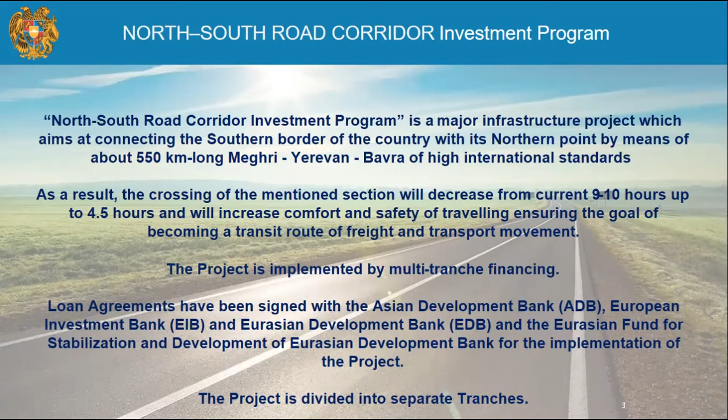On this slide, you can see all 5 tranches and the current status of implementation. The first tranche, 32 kilometers, is already completed. Tranche 2, Ashtarak-Talin, 42 kilometers, is in progress. Tranche 3, Talin-Gyumri, 46 kilometers, is in progress. Tranche 4, the Artashat-Sisian section, is the biggest one, 175 kilometers.

For this program we have the primary design. Today we will look in detail at the Sisian-Kajaran section, 60 kilometers, and Tranche 4's Kajaran-Agarak section, 45 kilometers, which is in progress. This section is financed by the Eurasian Development Bank, and Tranche 5, Gyumri-Bavra, is a prospective program.

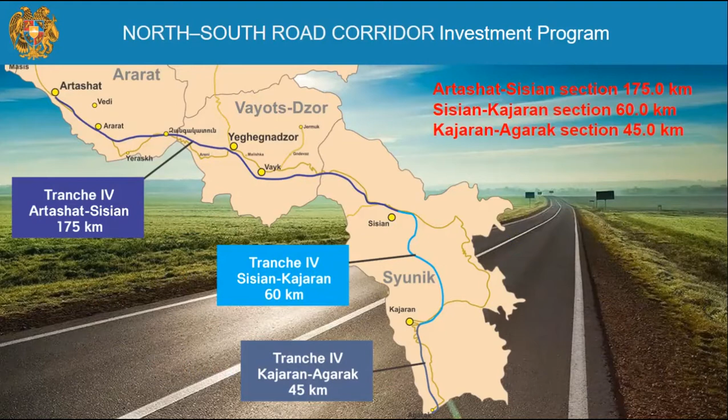On this map, you can see the geographic location of the tranches. The southern section of our program is Tranche 4, which consists of 3 sections: Artashat-Sisian, 175 kilometers, Sisian-Kajaran, and Kajaran-Agarak.

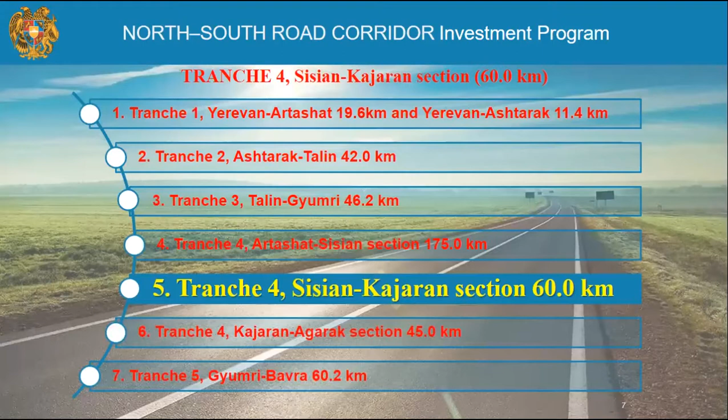Now a little bit in detail about the Sisian-Kajaran section. This section will be a completely new road. It is planned to construct a new second technical category road with a total length of about 60 kilometers, including 4.7 kilometers of bridges and tunnels totaling about 12.5 kilometers, the longest being the Bargushat tunnel at about 8.6 kilometers. The Kajaran section was designed with a new alignment, outside the existing alignment and interstate road, and the existing road can be used as an alternative.

Detailed design for the construction of the Sisian-Kajaran road section was developed in 2018. The total number of bridges is 27, all fully new, and the total number of new tunnels is 9.

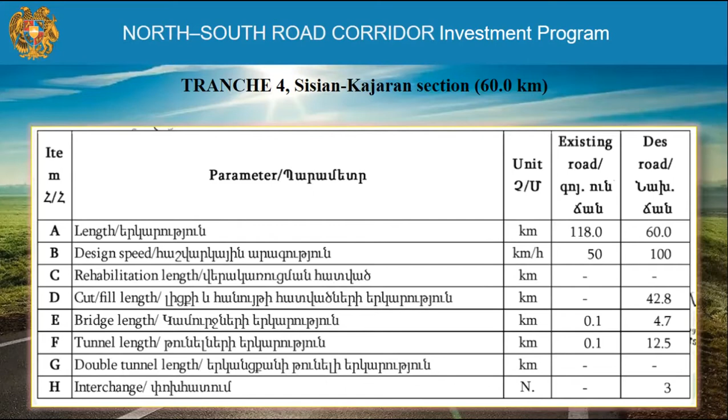On this slide, you can see a comparison of the technical parameters of the existing M2 road and the planned new road. The new road will meet international standards and will be shorter than the existing road by almost 58 kilometers. The new project will exclude the crossing of mountain passes, which increases traffic safety and convenience for heavy vehicles. The travel time from Sisian to Kajaran will be reduced, which will reduce travel costs.

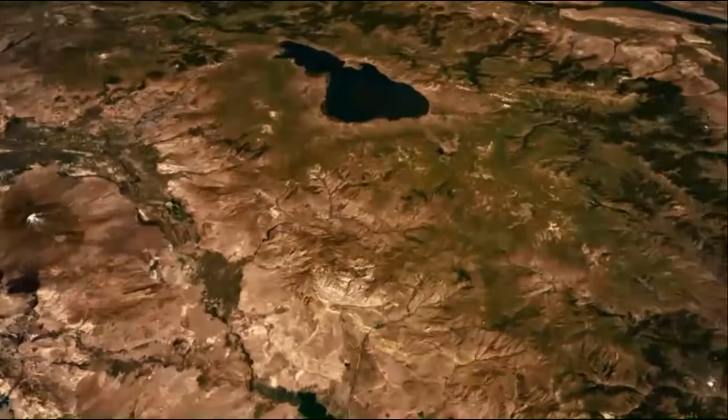North-South Road Corridor, Tranche 4, Sisian-Kajaran section. A preliminary evaluation of the Artashat South-Kajaran section of the North-South Road Corridor has been carried out. The aim of the new road corridor is to create access to the Black Sea through Armenia and Georgia, and then to European countries. It will provide new opportunities for development to all the communities lying from the north to the south of Armenia.

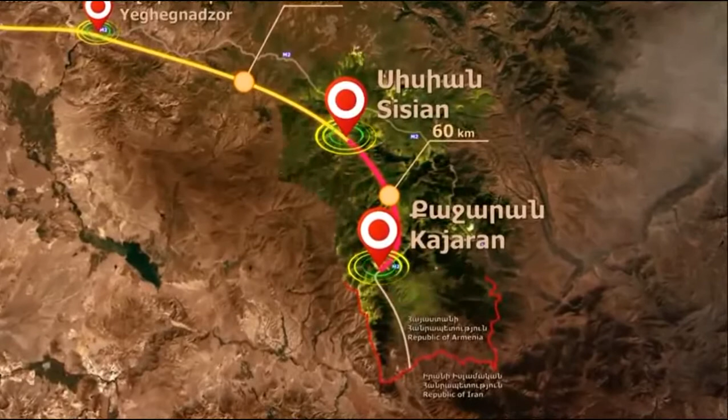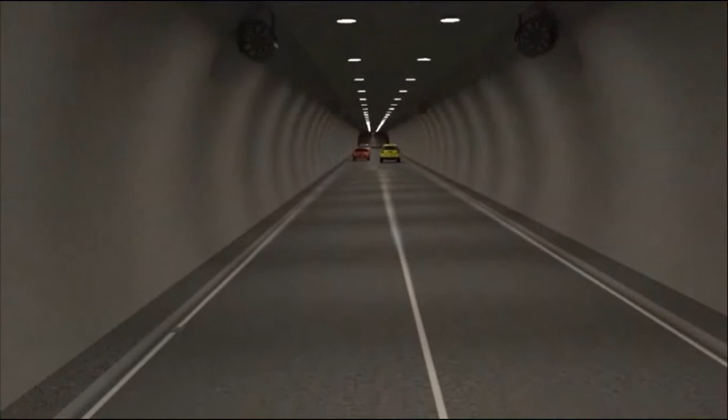Design criteria: the main road cross-section is arranged with two single running lanes, one for each direction, and one climbing lane. Climbing lanes are provided to facilitate the passing of trucks and slow-moving vehicles whose speed drops because of sustained steep grades. Climbing lanes are designed independently for each direction. For tunnel sections, climbing lanes are not included due to the huge increase in cost and the increase in tunnel dimensions compared with the benefits.

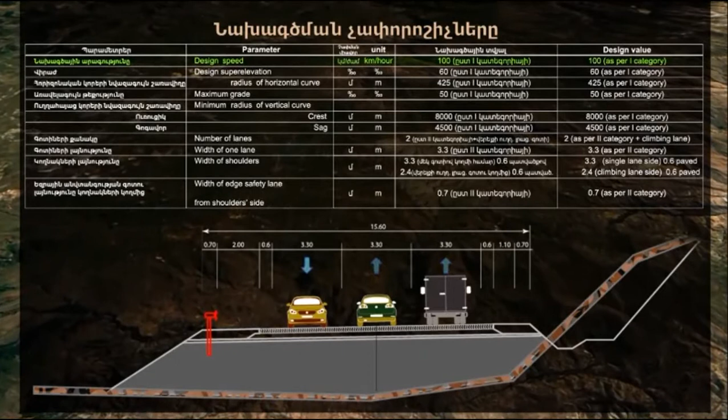Design speed as per first category is 100 km per hour. Number of lanes is 2 as per second category, plus a climbing lane. Width of one lane is 3.3 meters as per second category. Width of the shoulders is 3.3 meters for the single lane side, and 2.4 meters for the climbing lane side.

Description of the Sisian-Kajaran section. The Sisian-Kajaran section begins from the southern foot of Mount Metzishkhanasar, at 3,550 meters. It crosses the M2 highway, passes through the left bank mountain slope of the Vorotan River, and crosses the Vorotan River through the upper part of the Shamb water reservoir.

Then it passes through the nearby areas of Varatin, Vorotan, Darbas, and Lor communities, crosses the Bargushat Ridge with spot heights of 3,000 meters and higher, through the mountain slope on the left side of the Shenatach tributary, and passes through the mountain slope on the right side of the Voghji River Valley in the vicinities of Nor Astghaberd and Geghi communities. Finally, it reaches the right side mountain slope of the Kapan-Kajaran road section and continues to the entrance of the communities of Kajaran and Lernadzor.

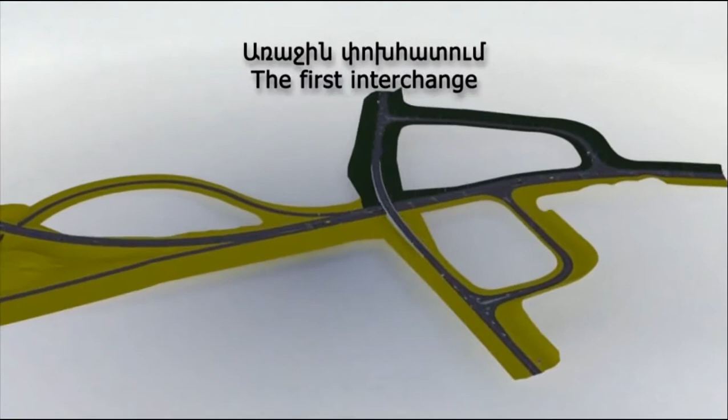Three interchanges are designed for the Sisian-Kajaran section. The first interchange is designed within kilometer 0 plus 0 and kilometer 1 plus 0, with the aim to connect the existing M2 and local roads with the newly designed Sisian-Kajaran road.

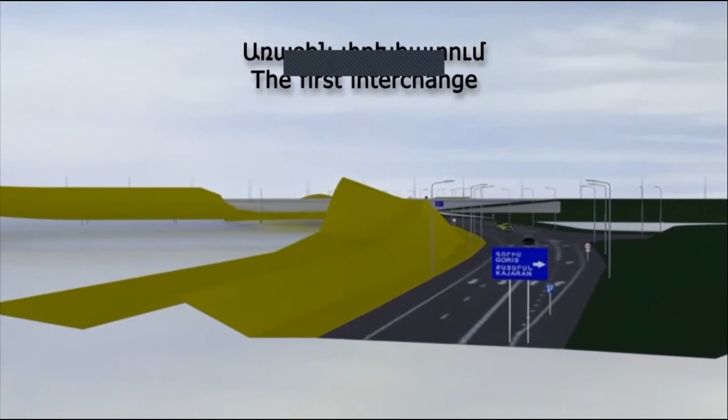The road will be furnished with safety barriers. Road signs will be placed to ensure traffic safety. From this preliminary analysis, the need for retaining walls is envisaged in many sites. The drainage system will be ensured by calculating water flows with culverts of different sizes and drainage chutes.

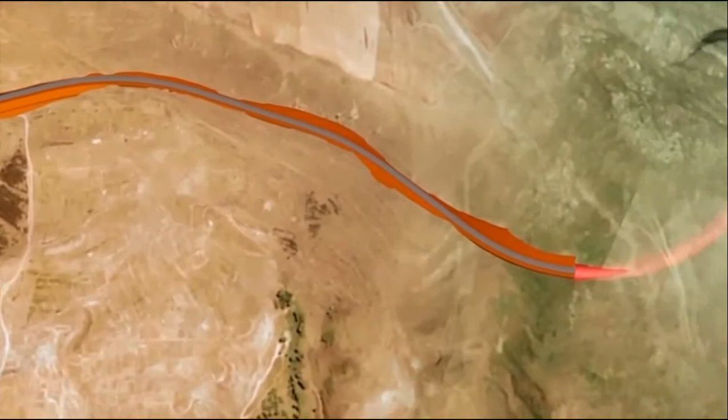Excavated soil and aggregates shall be reused as much as possible. The site locations of topsoil stockpiles and excavated material landfills will be properly designed. Permits and access to those sites should be obtained prior to the commencement of excavation works.

Air quality, noise and vibration shall be surveyed during the environmental impact assessment process in order to update the environmental baseline data.

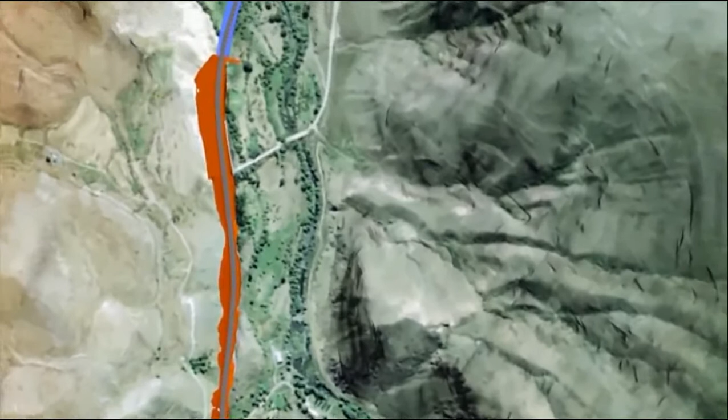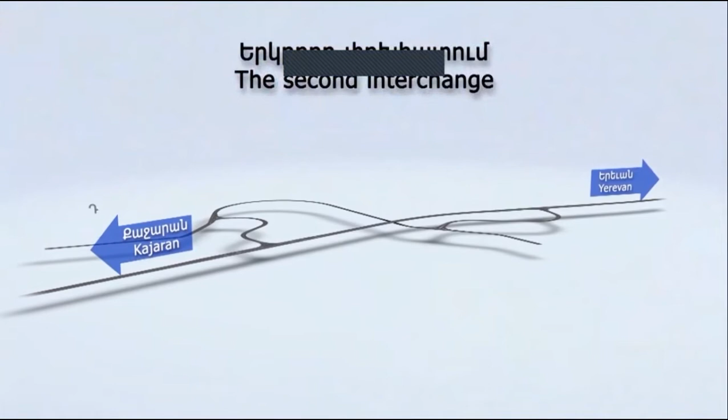The second interchange is designed within kilometer 15 plus 400 and kilometer 16 plus 300, with the aim to connect local roads to Varatin, Vorotan, Shamb, Lezen, Datev, Darbas, Getata, Lor, and Shenata with the newly designed route.

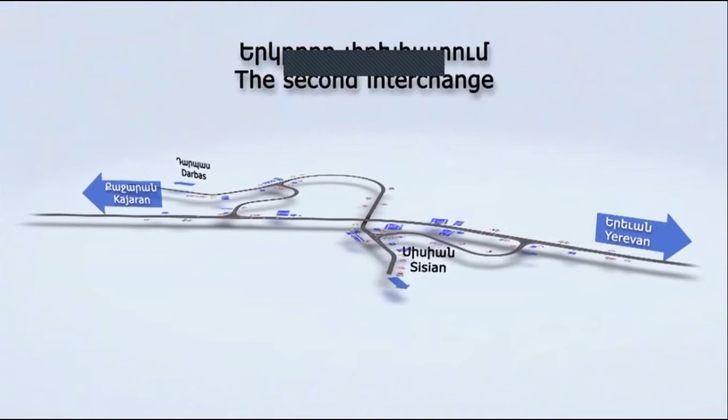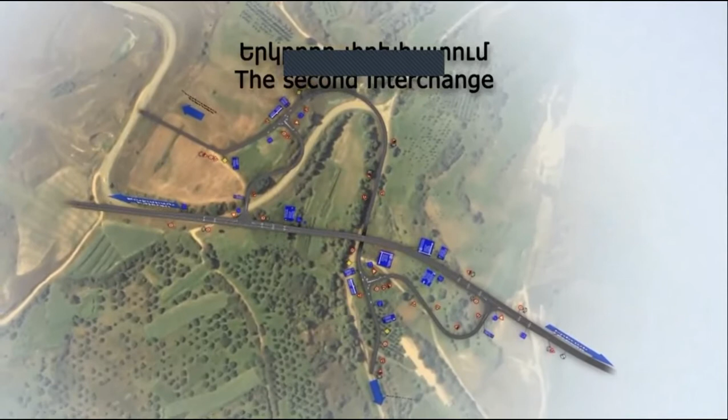The Sisian-Kajaran tranche of the north-south road corridor lies in a region of complex geology, characterized by extensive quaternary volcano-sedimentary deposits in the northern part, and by an orogenic belt constituted by sedimentary, igneous, and metamorphic rocks in the central southern part.

Road excavation will encounter a large variety of conditions, ranging from debris deposits, usually in a loose state, through partially cemented lacustrine soils, up to strong, medium to slightly fractured igneous rocks.

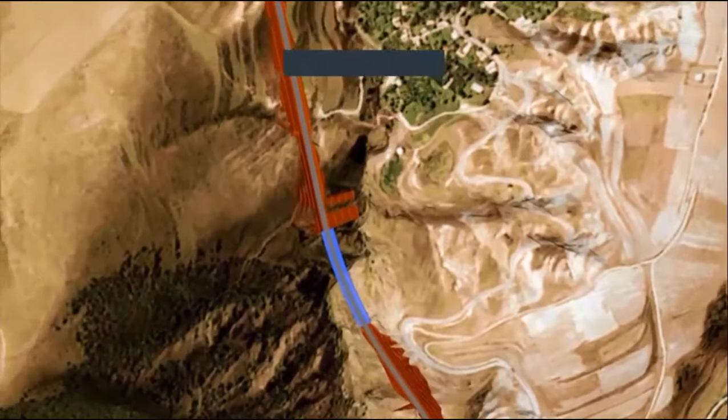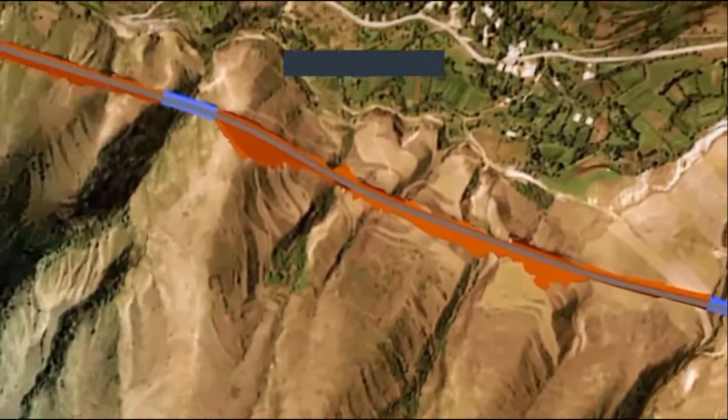Landslide activity along the valley sides is relatively limited and affecting mostly the superficial soil cover. However, a few large paleo-landslide bodies have also been identified that now appear to be in a stable state. Road foundations will usually rest on fair ground. Nevertheless, the use of piles may be required, especially for the abutments and piers of structures crossing loose deposits.

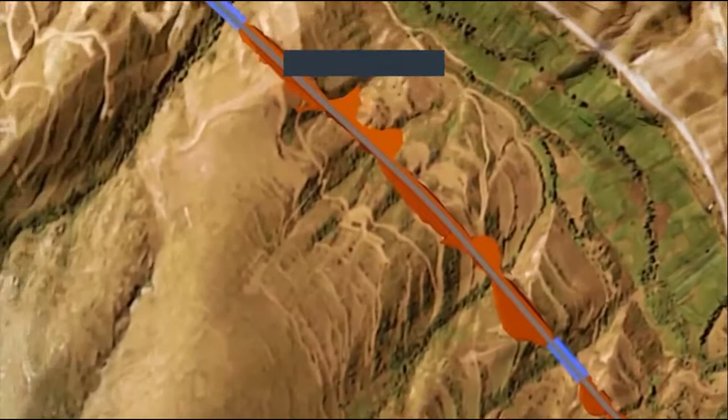Main obstacle of the Sisian-Kajaran road section is the Barghushat Ridge, about 3,200 meters above sea level. The proposed solution is to cross the ridge with the Barghushat Tunnel, which is 8,683 meters long. For this reason, safety issues are an important concern.

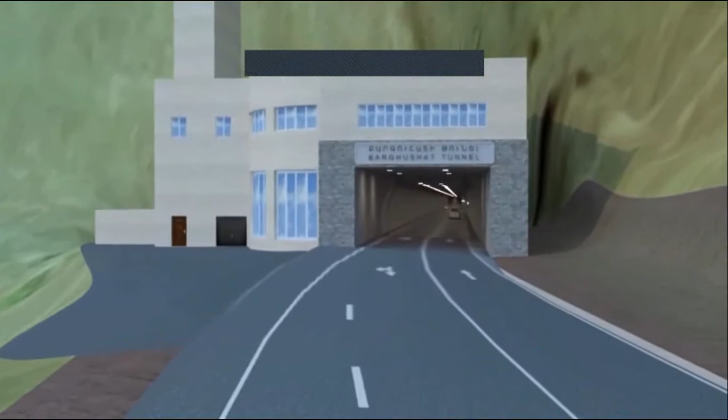The following prevention measures will be ensured: lighting, fire system, escapeway, access to escapeway every 500 meters, layby every 1,000 meters, SOS every 250 meters, smoke extraction, and ventilation.

In case of fire, the smoke is extracted by ventilation systems at both ends of the tunnel, inside the smoke extraction duct. People will have an escapeway located under the platform every 500 meters, and then an escape route to a safety place.

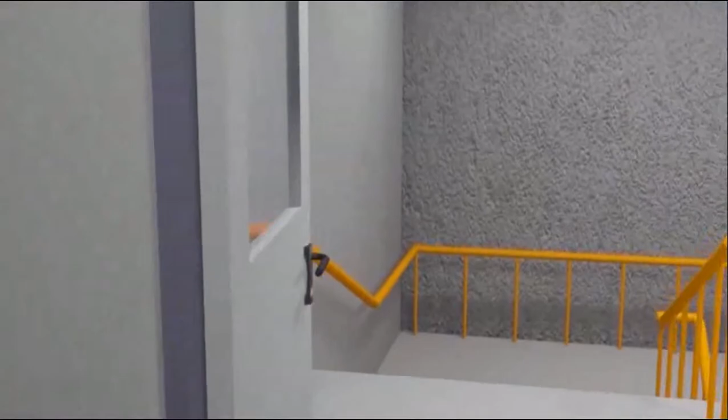In case of fire, passengers can reach the nearest emergency exit, one every 500 meters, and through the door and stairway reach the escapeway located under the road platform, which runs along the tunnel and finishes at both extremities with an exit to the outside. The entire zone, stairway and escapeway, is kept under pressure to avoid the entrance of smoke and allow a safe exit to the passengers.

The geological conditions along the base tunnel, with a length exceeding 8 kilometers and a maximum overburden of 1,160 meters, are foreseen to be extremely variable due to the complex geological structure of the Barghushat mountain range. Therefore, a high level of geological risk should be expected.

Up to the Barghushat Tunnel and after that, the area is characterized as challenging, especially in terms of vertical slopes. Due to the complicated relief features of the area, a large number of bridges and tunnels are designed.

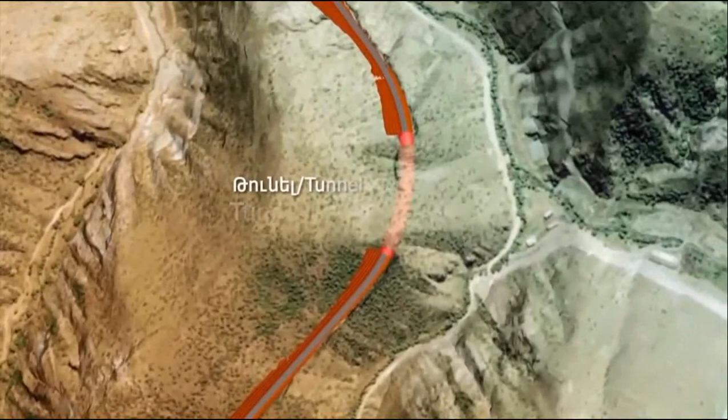In the cut sections, the maximum height of the cut is 10 meters. The slope of the cut is related to the type of soil. Every 10 meters, a 2-meter bench is located to assure the stability of the cut and to accommodate rolling material coming from the top.

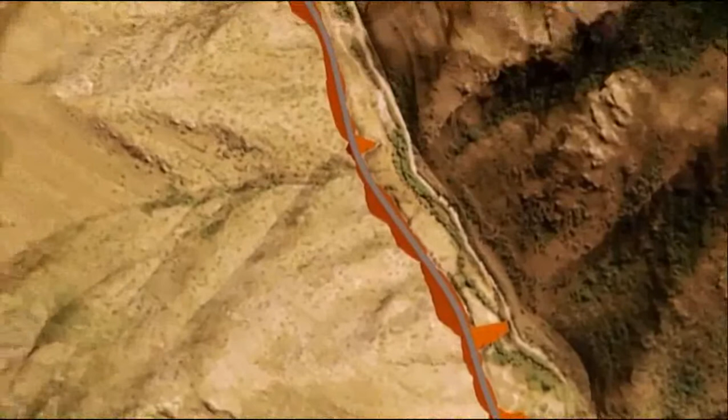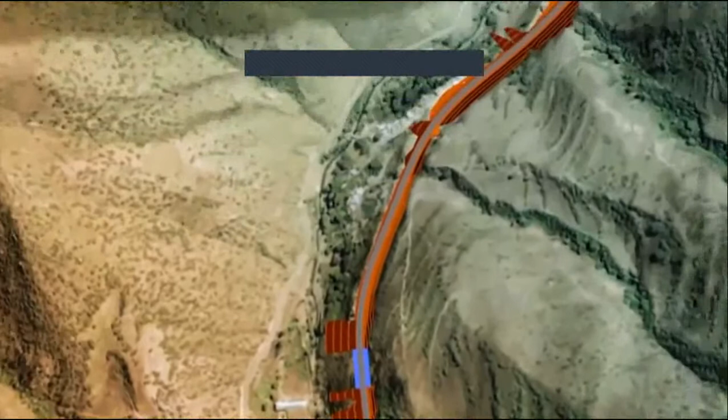There are agricultural and non-agricultural, special use, forest and water lands in the affected communities of the Syunik province. Most of the affected lands are community-owned. The studied corridor project does not have any negative impact on the quality of the soils in the surrounding areas.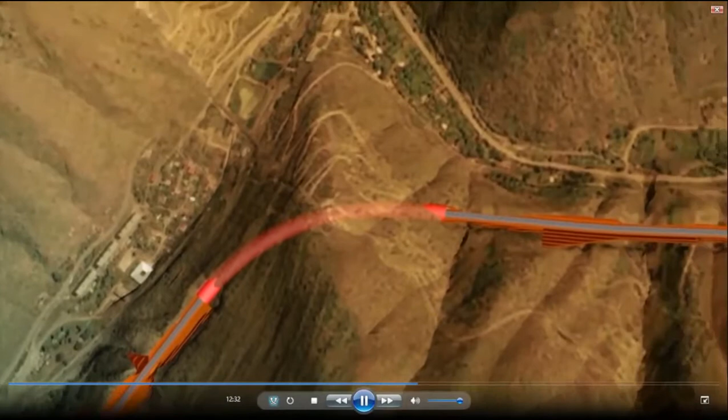The third interchange is designed to connect the newly designed road section to the existing road between kilometers 55 plus 500 and kilometers 59 plus 0, through which the movement of vehicles will be implemented with Kapan and adjacent communities.

This intersection will give an opportunity to move with separate ramps, from Kapan to Sisian, from Sisian to Kapan, from Kapan to Kajaran, and from Kajaran to Kapan.

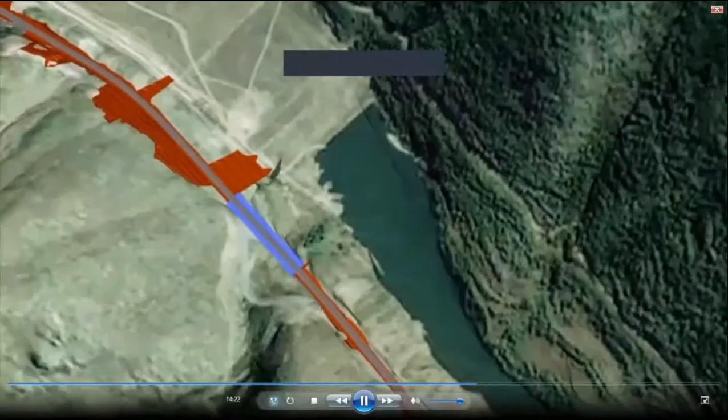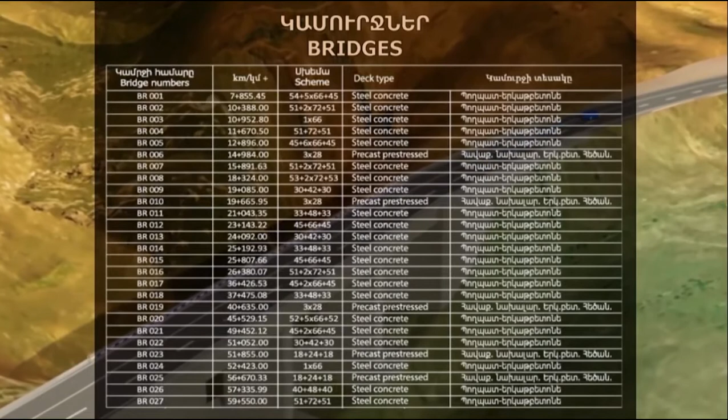Bridges. Main structures of the project consist of bridges aimed to cross valleys, rivers, or other kinds of obstacles. The total number of bridges is 27, grouped into the following main typologies: steel concrete bridges with maximum span length up to 72 meters, and precast concrete bridges with maximum span up to 28 meters.

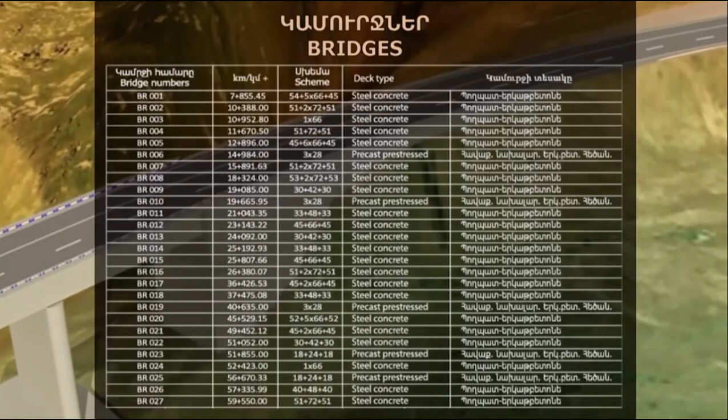The Sisian-Kajaran area is totally mountainous, making it more difficult and challenging to face. Depending on the steepness of the valleys, most of the bridges, 22, are built with steel concrete decks, while the other 5 are made with prestressed precast beams, which are cheaper. In terms of length, the steel bridges make up more than 90% of the total length of bridges.

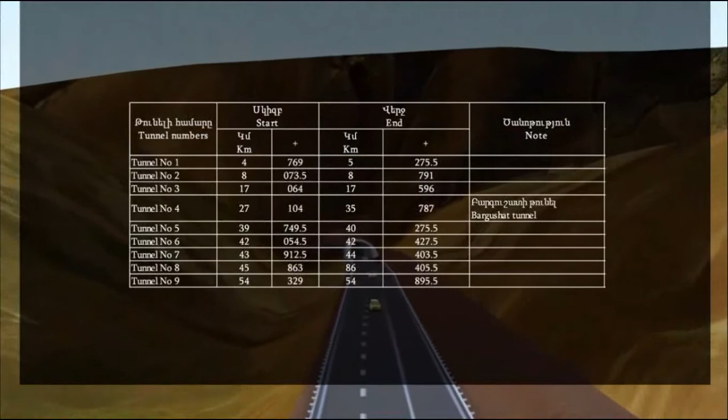Tunnels. For the design of the 9 galleries included in the project, it has been assumed the construction of only a single tube, meaning a single carriageway with two-way traffic. The construction of the second tube is postponed to another phase.

The total tunnel length is 12,938 meters. The number of galleries less than 1,000 meters is 8, with a combined length of 4,255 meters. Minimum and maximum cross-sections of short tunnels are 110 square meters and 128 square meters.

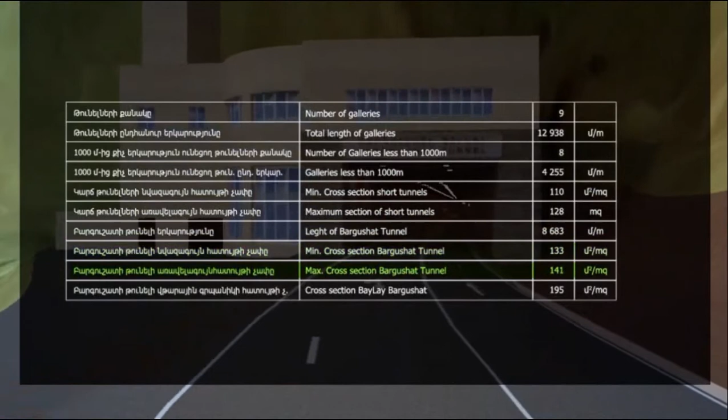Length of Bargushat Tunnel is 8,683 meters. Minimum and maximum cross-sections of Bargushat Tunnel are 133 and 141 square meters. Cross-section of BayLay of Bargushat Tunnel is envisaged to be about 195 square meters.

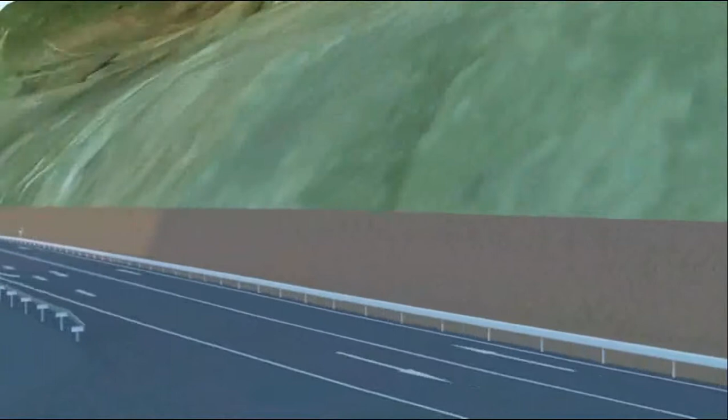B-type is to be applied when the core face is stable in the short term, medium good rock. C-type is to be applied when the core face is unstable, bad rock or terrain. Each tunnel is designed separately.

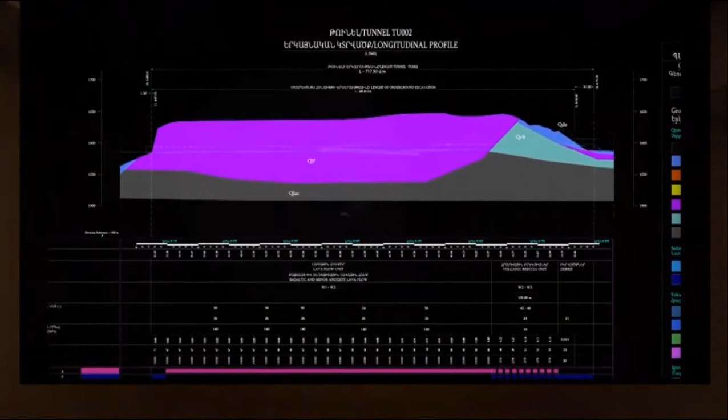The input data were reported on the profile and accordingly the different sections are applied, giving a change at the beginning and a change at the ending of the tunnel. A numeric evaluation of the structural parts, number of micropiles, thickness of the lining, typology of the steel ribs, etc.

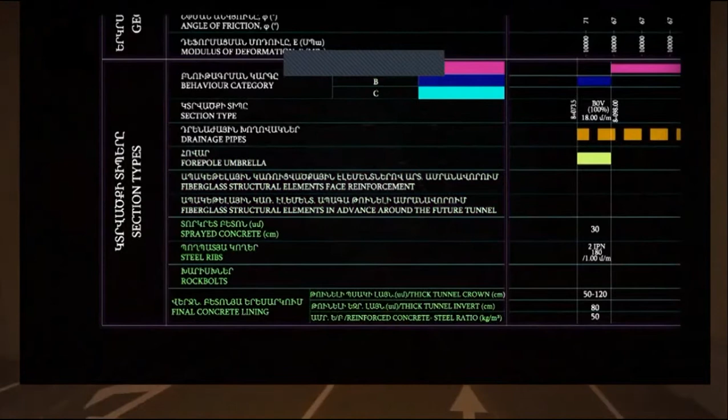The sections A, B, C to be applied, with a percentage of application of the sections when there are more than one in a single part. There will also be a guideline to help choose the right section depending on the real condition of the rock, directly observable during the works.

Sometimes it was preferred to give different sections of application with a percentage for each of them. This will allow the engineer, during the works, when the face front of the gallery is directly observable, to choose the better one among different types.

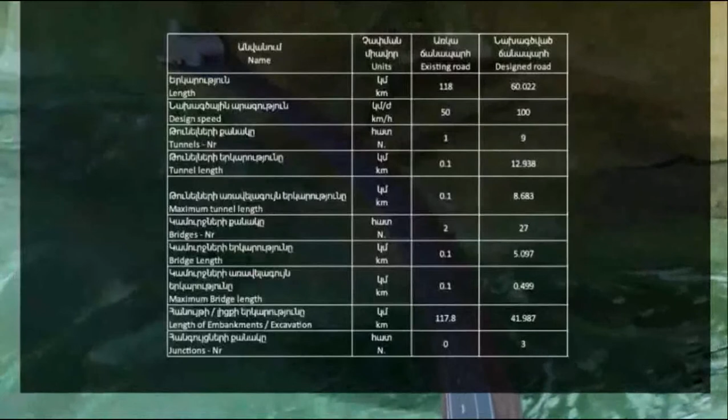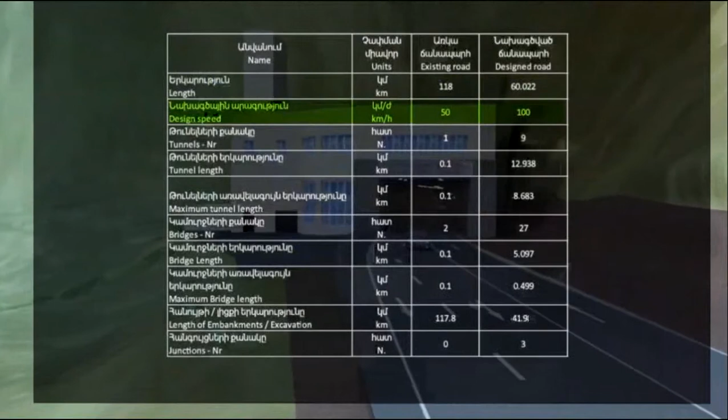Summarizing the data, we can say that the length of the designed Sisian-Kajaran road section is 60 km and 22 meters. Design speed is 100 km per hour. Number of tunnels is 9. Number of bridges is 27. Number of interchanges is 3.

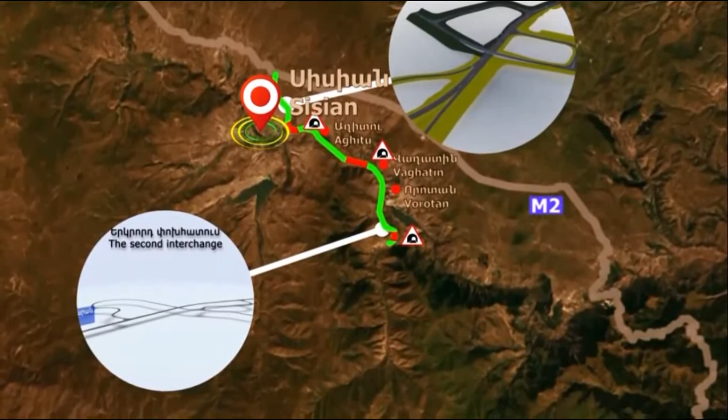To study the historical, cultural, and archaeological resources along the alignment of the Sisian-Kajaran Road project, 3 information sources were used: the state's list of immovable monuments of history and culture of the Republic of Armenia for the Syunik province, and unpublished survey data of several archaeological teams working in the targeted areas since 1990.

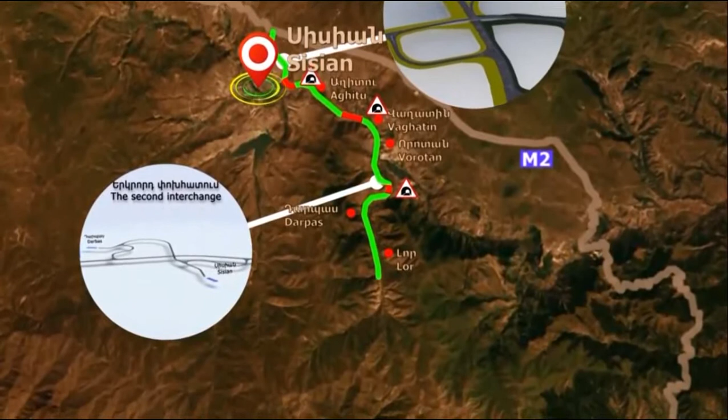Field investigations were conducted along the alignment for the record of the resources having historical, cultural, archaeological, paleontological, and spiritual significance.

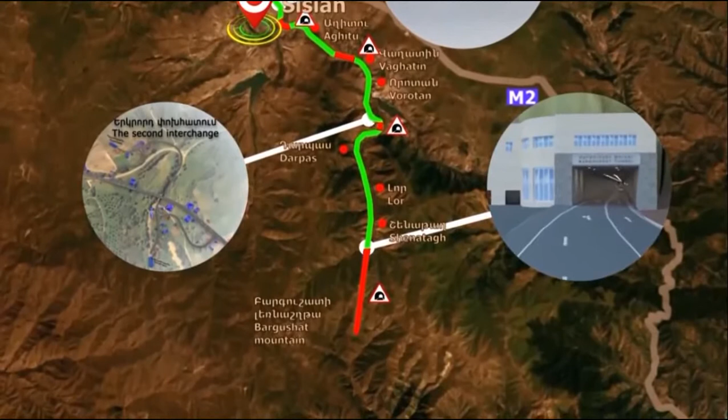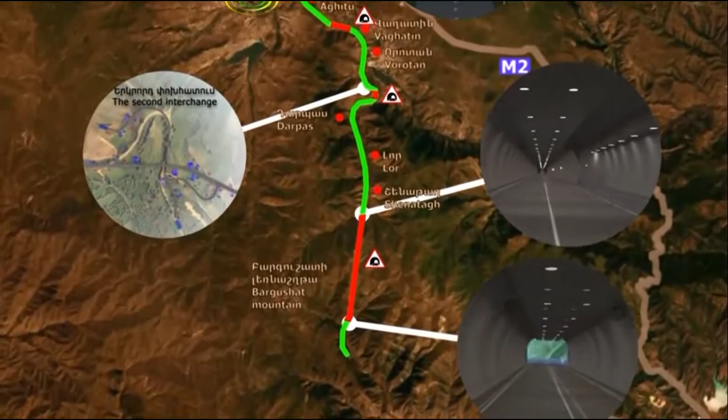The potential negative impacts, such as nuisances from dust, noise, traffic and access changes, are likely to be experienced by nearby communities. The impact on flora and fauna associated with the location and the construction works will be temporary and can be minimized by following the site-specific environmental management plan, providing adequate supervision and ensuring the timely implementation of the mitigating measures outlined in the environmental management plan.

Noise mitigation measures shall be implemented in order to reduce noise impact during the operation phase. For example, a 2 meters high noise barrier will be installed at the impacted hospital.

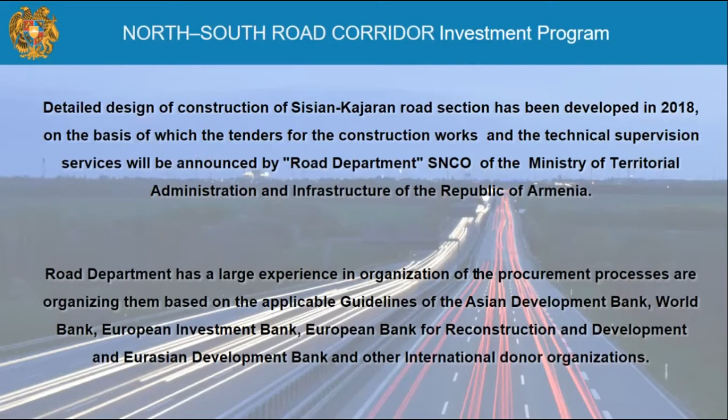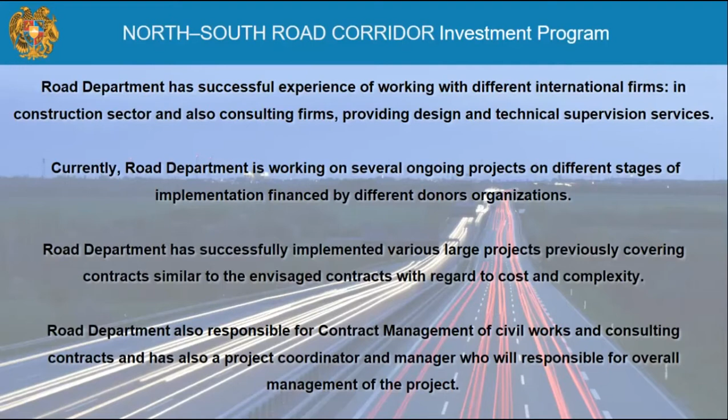Road Department also has successful experience working with different international organizations, construction firms and consulting firms providing design and technical supervision services. Currently, Road Department is working on several ongoing projects at different stages of implementation, also financed by different donor organizations. Road Department has successfully implemented various large projects previously, covering contracts similar to the envisaged contracts with regard to cost and complexity. Road Department is also responsible for contract management during all implemented projects for civil works and consulting contracts, and has a project coordinator and contract manager who will be responsible for management of the project.

Taking into account the importance of this program and its strategic significance from the point of view of the country's social, economic, and regional development, the tenders will be organized in an open procedure, which will increase international interest and participation in tenders. As a result of the tender procedures, contracts will be signed compliant with the FIDIC contract, which is widely used in international practice and will stipulate a clear framework of the rights and responsibilities for all parties: the employer, contractor, and consultant.

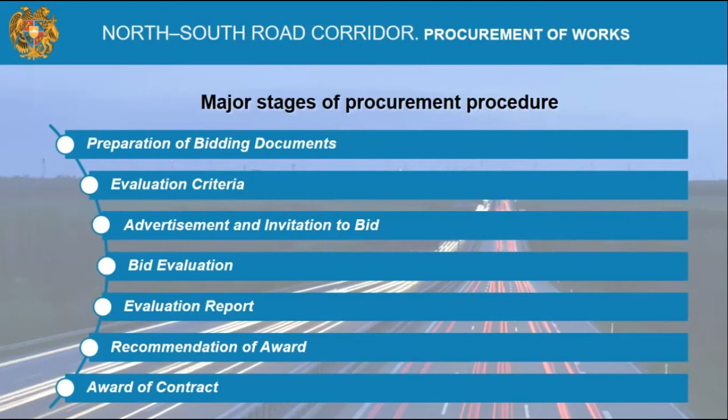Now let's go ahead with the major stage of the procurement procedure. We're speaking about the procurement procedure for civil works. It included preparation of bidding documents, evaluation criteria, advertisement and invitation to bid, bid evaluation, evaluation report, recommendation of award, and award of contract.

Publication of advertisement and invitation to bid will be done via mandatory and supplementary means of advertisement. The announcement will be published on Procurement.am, the official website of the Ministry of Finance; MTAD.am, the official website of the Ministry of Territorial Administration and Infrastructure of the Republic of Armenia; and ArmRoad.am, the official website of Road Department SNCO. The announcement will also be shared with various national sources and many other outlets, including our Facebook page and the Facebook page of our ministry. Additionally, we're planning to share the announcement with embassies to notify potential companies from their countries.

The timeline for preparation of bids will be counted in days from publication of the advertisement and invitation to bid until the deadline for submission of bids. It will be not less than 52 days.

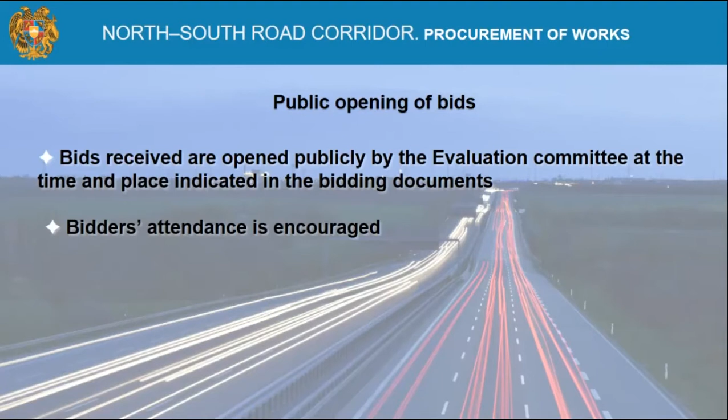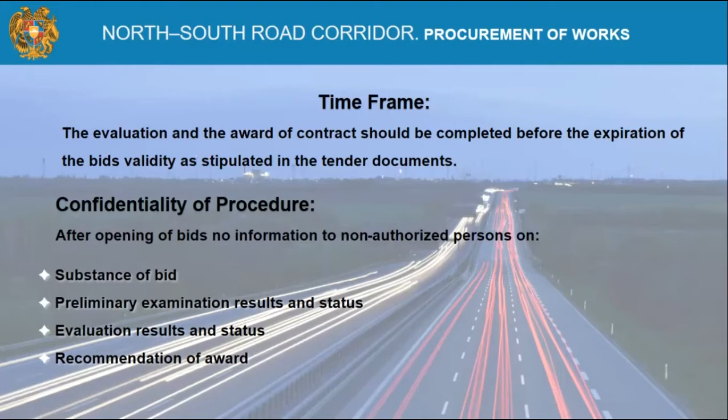The timeframe from evaluation to the award of contracts should be completed before the expiration of bid validity, as stipulated in the tender documents. Confidentiality of the procedure should be ensured. After opening of bids, no information should be given to non-authorized persons on the substance of bids, preliminary examination results and status, evaluation results and status, or recommendation of award.

So let's talk about the major qualification requirements that will be presented in the bidding documents. First of all, it's experience and past performance. Generally, this means similar contracts that participants have satisfactorily and substantially completed as contractor within the last years — we speak about the last 10 years.

Later, it's the financial situation and financial resources that will be evaluated during the evaluation period.

Technical capability: the participant must demonstrate that it has the key equipment required in the bidding document, and also must present written confirmation that all equipment proposed in the tender documents is in operable condition, functioning properly, and will be at the construction site when the relevant activities start, as described in the working schedule. These and all requirements regarding equipment type and characteristics will also be described in the bidding documents.

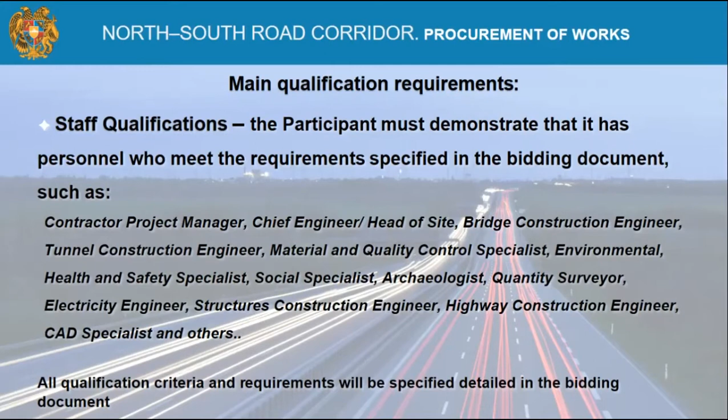The next evaluation criterion is staff qualification. The participant must demonstrate that it has personnel who meet the requirements specified in the bidding document, such as contractor's project manager, chief engineer, bridge construction engineer, tunnel construction engineer, and other positions proposed in the bidding documents. All qualification criteria and requirements for each key expert will also be specified in detail in the bidding documents.

After evaluation, publication of the evaluation result and contract award will be done on Procurement.am, the official website of the Ministry; on MTAD.am; and on ArmRoad.am, our Road Department's official website. The published document will include the name of each bidder, bid prices as read out and evaluated bid prices, names of bidders rejected and the reason for rejection, the name of the winning bidder and price offered, and the duration and summary scope of the awarded contract.

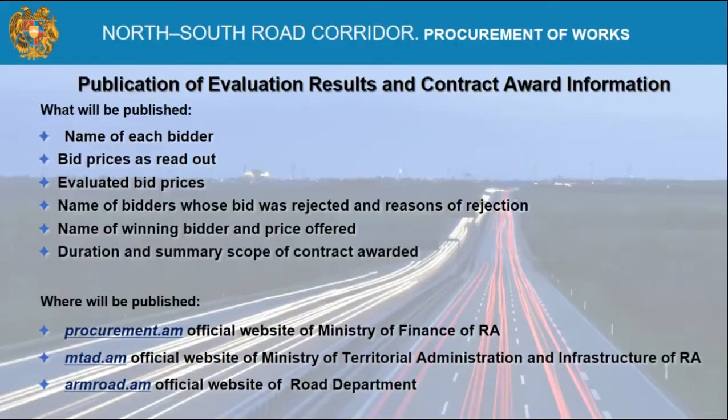So at this stage, I will finish with procurement of works. And now let me introduce to your kind attention the next part of my presentation: the procurement of consulting services.

Procurement of consulting services will be organized for selection of engineer services for section Sisian-Kajaran Tranche 4 project.

As most of us already know, the most general part of the tender documents for selection of engineer and any consultant is the terms of reference for the assignment, let's name it TOR. The TOR clearly defines the objectives, goals, and scope of the assignment and provides background necessary information for preparation of proposal for each participant.

In accordance with TOR of this selection procedure, the consultant shall perform duties of FIDIC engineer as described in the FIDIC condition of contract for construction for all civil works provided by the detailed design, including the tunnels and new bridge.

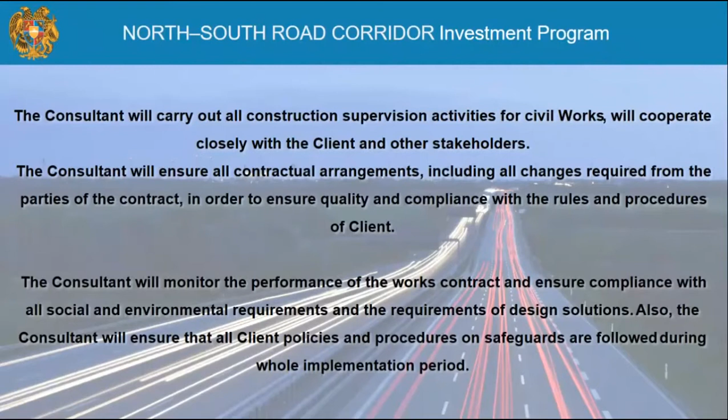Also, the consultant will be responsible for development and implementation of overall monitoring plan and for development of a consolidated construction program showing the critical path of the overall implementation program. During the period of this assignment, the consultant ensures the storage of all records.

In the framework of the contract for construction work, implement the daily coordination, monitoring and supervision of all actions, including the preparation and submission to the client of required reports. All these and other responsibilities of construction and contractor will be specified in detail in the TOR of the assignment.

Now let's go ahead with major stages of procurement procedure. Firstly, it was preparation of TOR and then tender documents.

The next one is pre-qualification stage. After that, we go with submission and public opening of proposals, and then will start evaluation of proposal, and finally, contract award.

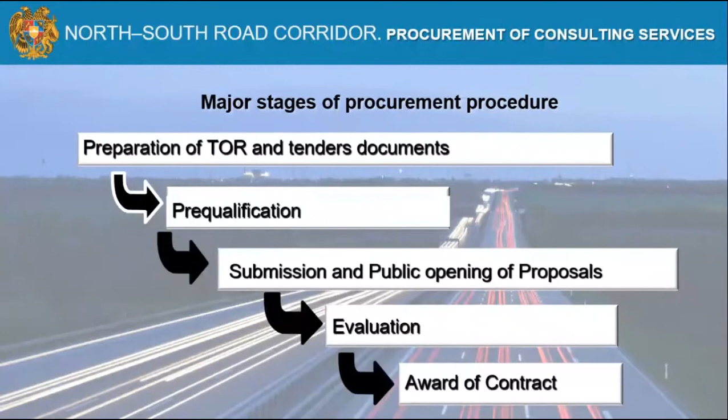The announcement of tenders is made via mandatory and supplementary means of advertisement. This part is the same as during civil works, and all announcements will be published in Procurement AM, MTID AM, and Armroad AM official website. It will also be shared with local electronic newspaper and shared with embassies.

The date for preparation and submission of proposal will be counted from the issuing day of invitation to the deadline for submission. For pre-qualification application, it will be not less than 30 days, and for preparation of proposal, it will be not less than 45 days.

Public opening of proposal will be done by evaluation committee at the time and date also described and mentioned in the tender documents. Participation of participants is also encouraged.

The evaluation and the award of contracts should be completed before the expiration of the proposal's validity as it's stipulated in the tender document. The date of proposal's validity will be described in detail in the tender documents.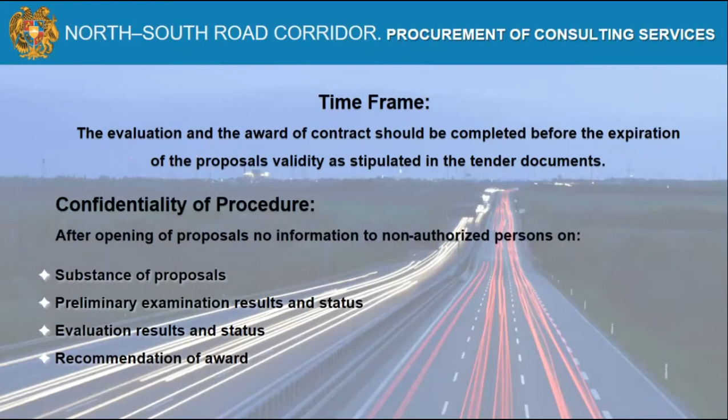In this selection process, all confidentiality of procedure will also be kept. After opening of proposal, no information will be given to non-authorized persons on the substance of proposal, preliminary examination result and status, evaluation result and status, and recommendation of award.

Now for the general part of tender documents, the main qualification requirements and criteria will be included in the tender document. This is a minimum part of requirements, but it is the major part.

The consultant's relevant experience for the assignment: the consultant shall have extensive and proven experience in construction supervision, program administration, financial management, and program performance management, highway design, preparation of technical specification, quality control, contract management, and dispute resolution of similar type and size international contracts.

The consultant also shall have knowledge and experience in reviewing environmental assessment and resettlement plan, resettlement action plan for road construction typical programs. Then we will evaluate the quality of the methodology proposed by the consultant.

The other evaluation criteria is about the qualification of the key experts. In the tender documents will be proposed key experts, and please see below the main key staff proposed for this assignment. I would like to remind that this is a minimum number of staff; maybe in tender documents some positions will be added.

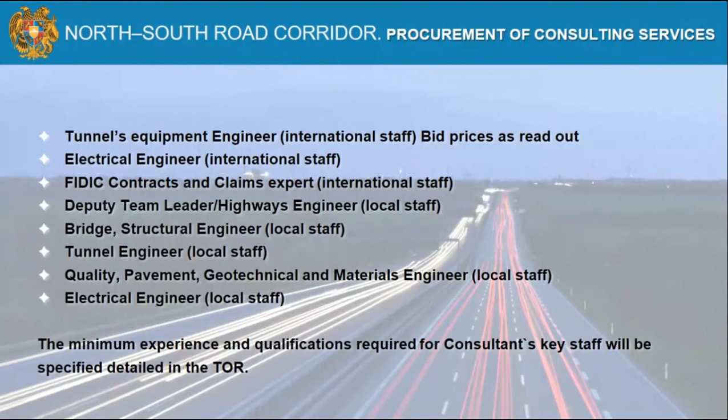Then let's go ahead with local staff: deputy team leader, highway engineer, bridge structural engineer, tunnel engineer, quality pavement, geotechnical and material engineer, and electrical engineer. This was the minimum number of staff that will be proposed in our bidding document, and the experience and qualification requirements for consultant key staff will be detailed and specified in the TOR.

After this stage, after evaluation of results, the contract award and evaluation results will be published in this source, in procurement.am, mtad.am, and armroad.am. The contract award notice will include the name of each participant, proposal prices as read out, evaluated proposal prices, names of participants whose proposals were rejected and the reason for rejection, the name of the winning firm and offered price, and the duration and summary scope of the awarded future contract. So this is all for this moment about procurement.

I hope it will be helpful for you during preparation. Thank you for your attendance.